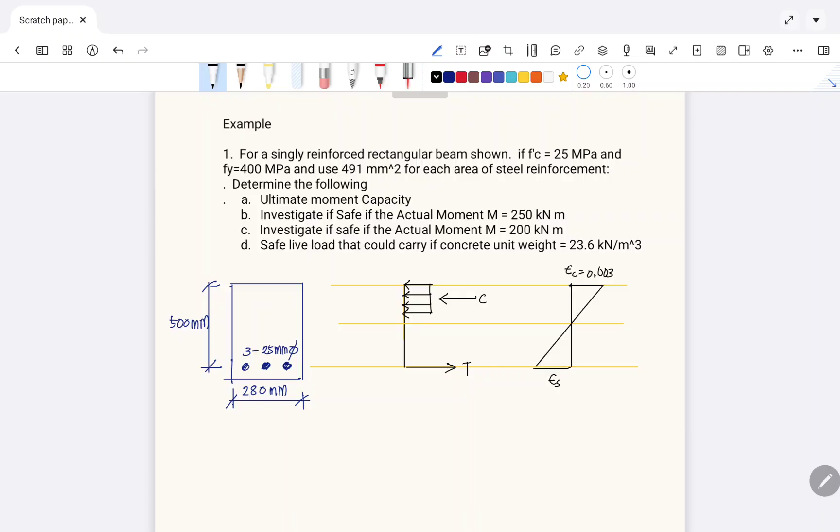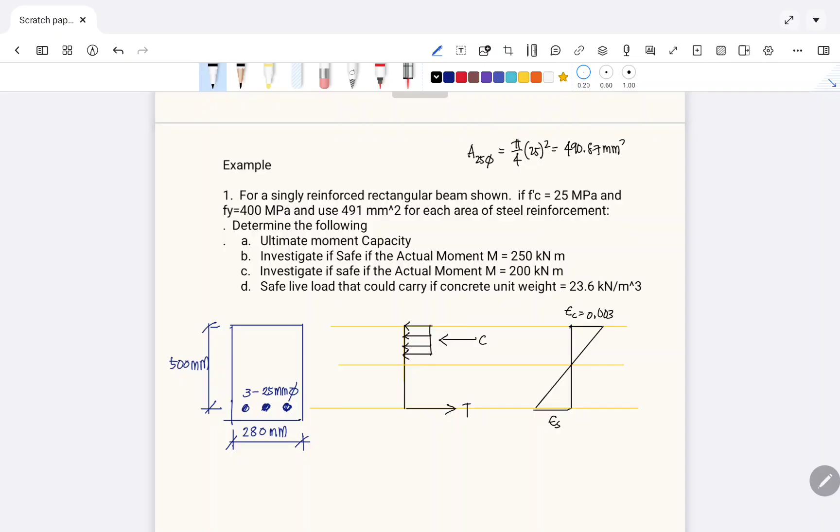Example: for a singly reinforced rectangular beam shown, FC prime is 25 megapascal and Fy is 400 megapascal, and use 491 millimeters squared for each area of steel reinforcement. The area of steel reinforcement was given in the problem. But if not given, you can use the conventional way: area of a 25mm diameter bar is pi over 4 d squared, so 25 squared, which gives 490.87 millimeters squared - almost the same. Since the problem already stated that the area used is for a 25 millimeter diameter bar, determine the following ultimate moment capacity.

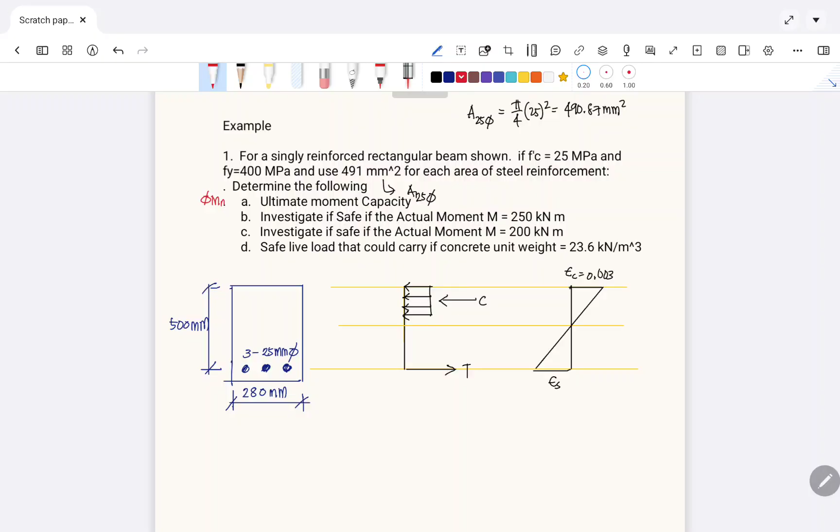So for number 1, what is asked is the phi MN. Okay, so this is an investigation - check if it's safe or unsafe. So what we'll do here is compare that phi MN should be greater than or equal to MU, our MU.

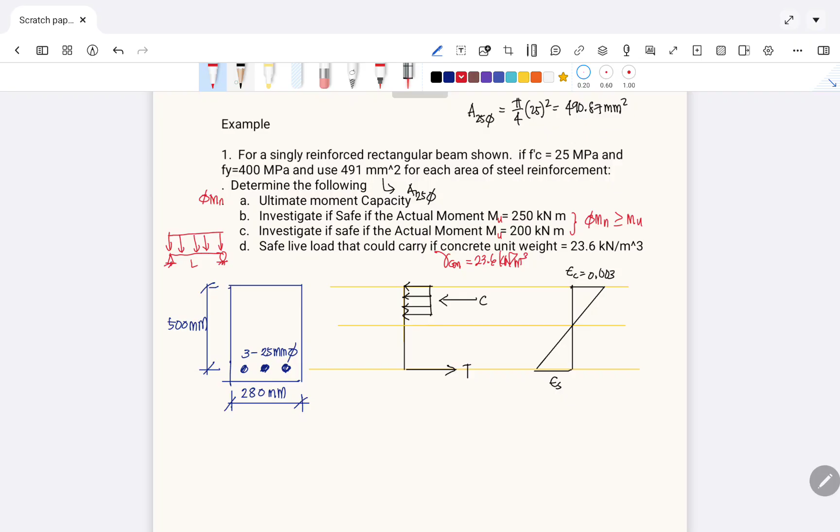Once we compute that, then determine the safe live load that it could carry if the concrete unit weight given is 23.6 kilonewton per cubic meter. Since it's not stated in the problem, it's automatically assumed to be a simply supported beam carrying only a uniform load, like this, with span L. The span L should be given, so let's add that it has a span of 6 meters.

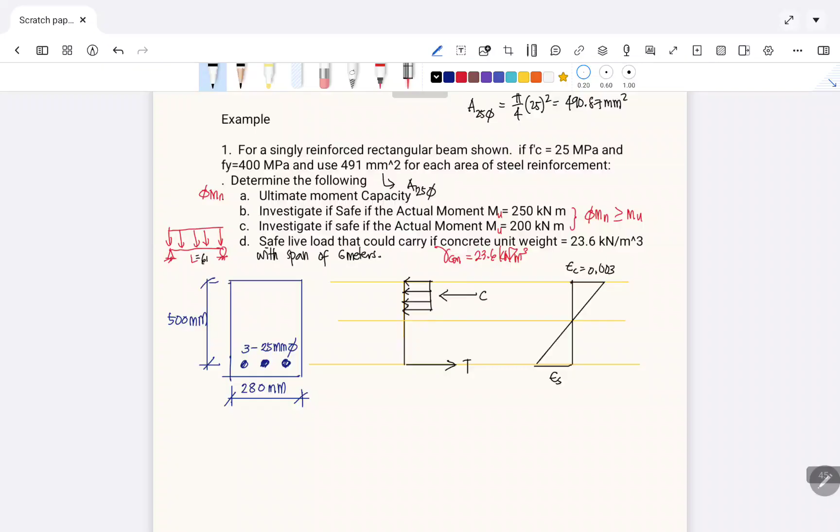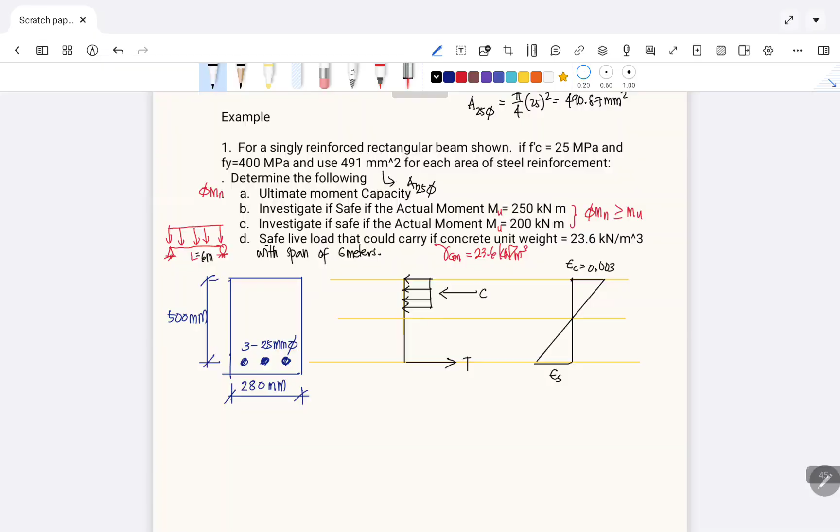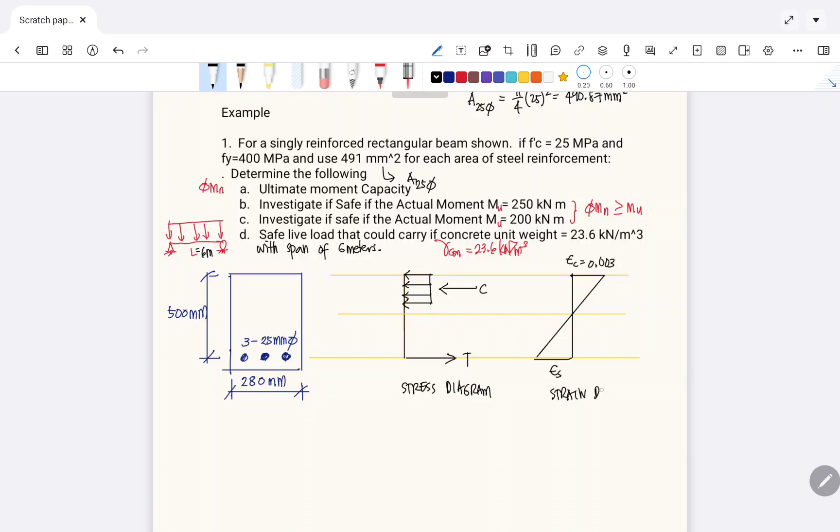Okay, so to solve this problem, let us now try to compute. So here I've drawn our stress diagram and our strain diagram. From that, we can now compute our capacity.

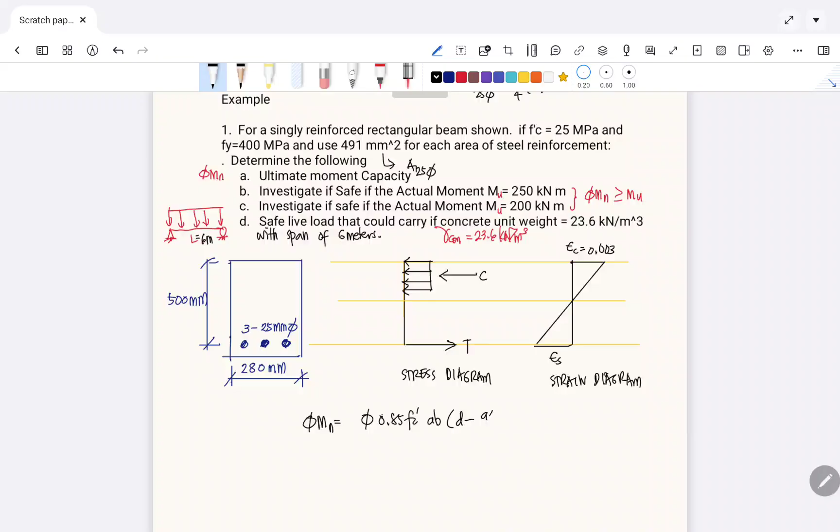Our capacity, phi MN, can be computed as 0.85 FC prime AB times (D minus A over 2). It can also be expressed as phi MN equals AS times Fy or Fs, times (D minus A over 2), depending on which one governs.

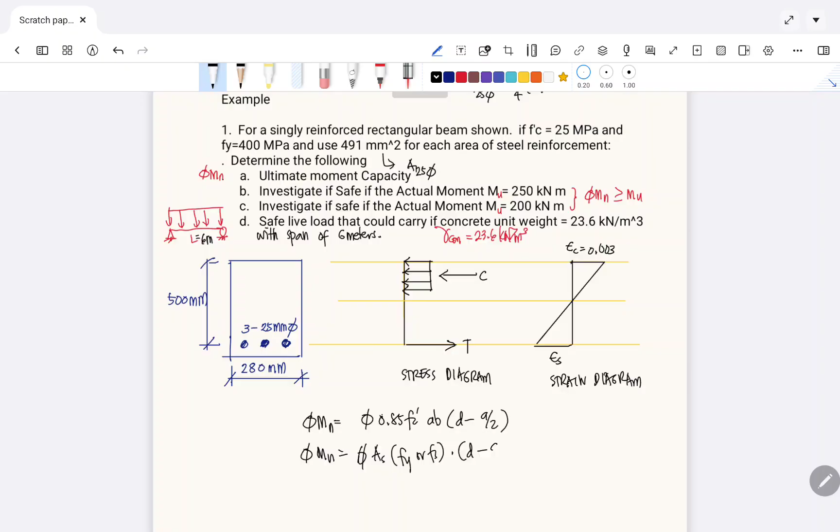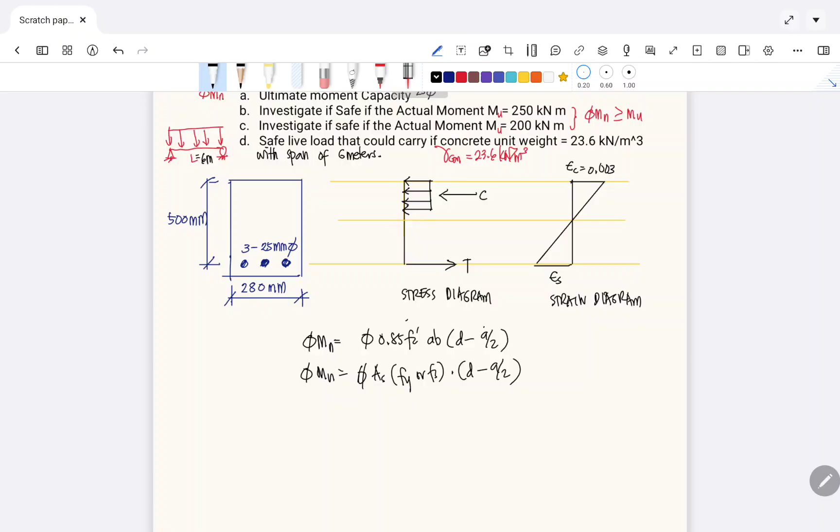Now, FC prime is given, so we can also compute phi. But first, let's compute the value of A, because our reduction factor depends on whether it's tension controlled or compression controlled.

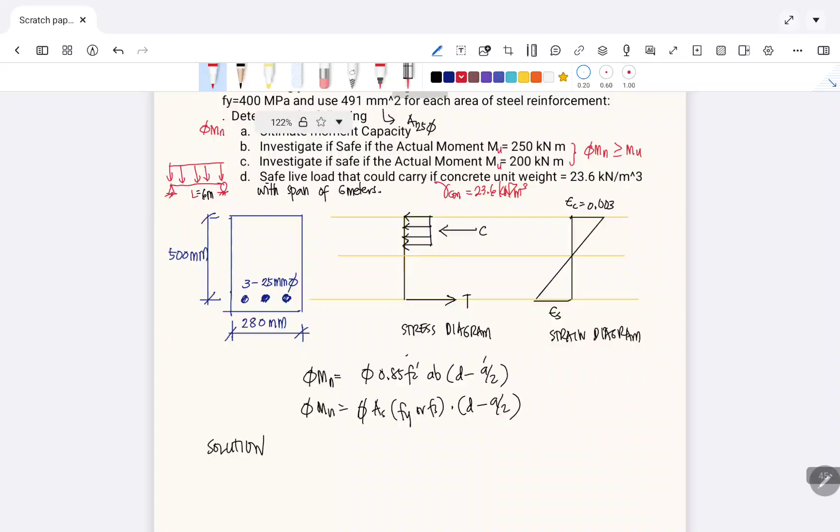So for the solution, let us now compute for the depth of the compression block. This is 0.85 FC prime AB, and this equals AS Fy or Fs, depending. Then this is Fy over Es or Fs over Es - that is the yield strain of steel. We don't yet know if we'll use Fs or Fy.

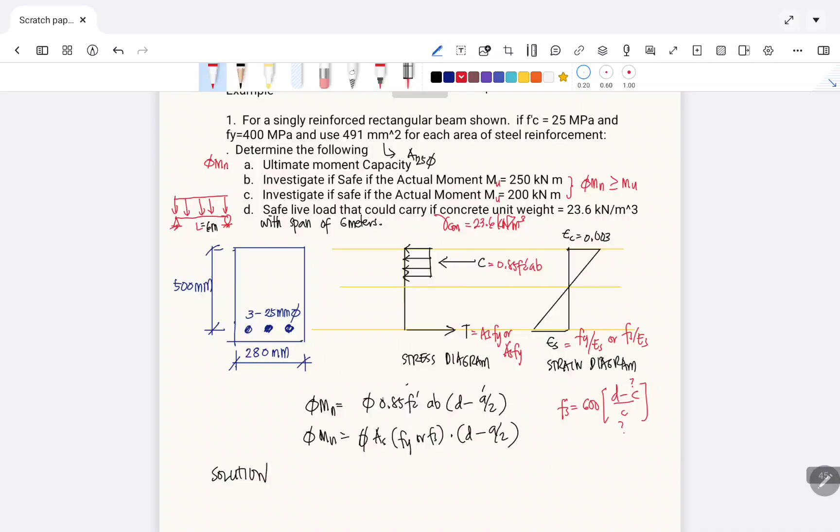So Fs is equal to 600 times (D minus C) over C. We also need to solve for the value of C, since our C is based on the depth of the compression block. So our solution requires us to first compute the depth of the compression block.

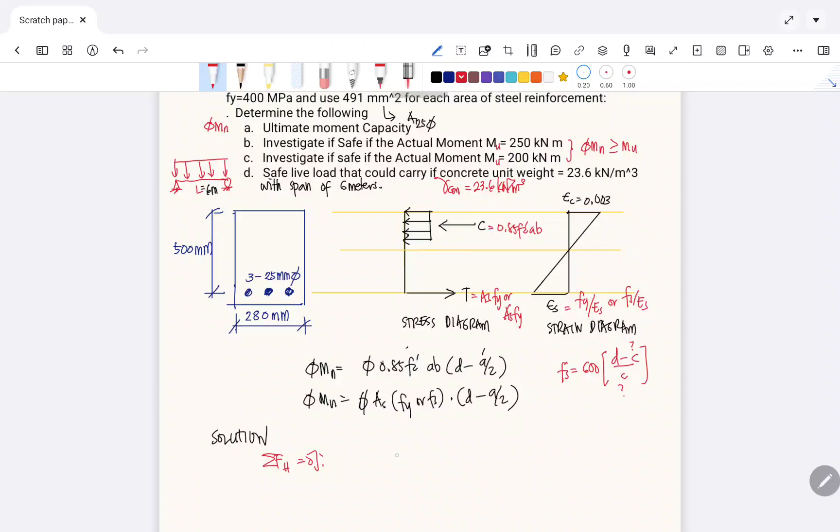By applying summation of forces horizontal equal to 0, C is equal to T: 0.85 FC prime AB equals AS times Fy or Fs - we don't know which yet. So let's assume tension steel yields; we'll make this assumption first to speed up our computation. So we assume that Fs is greater than or equal to Fy.

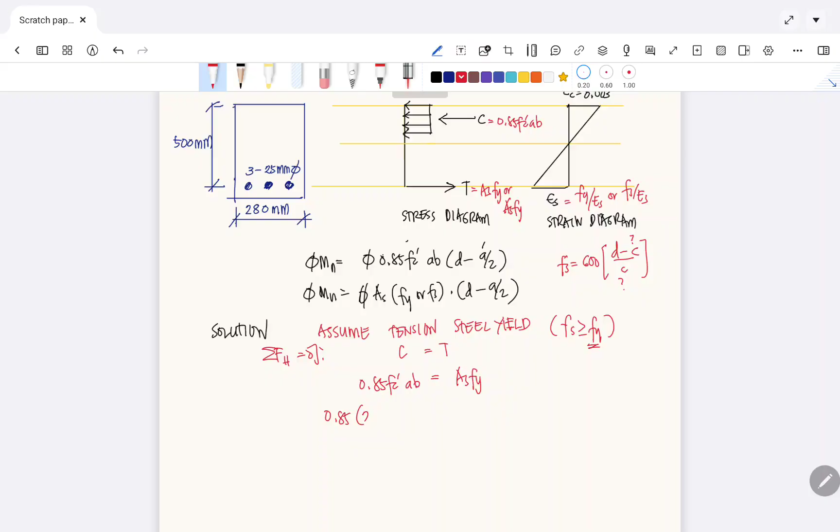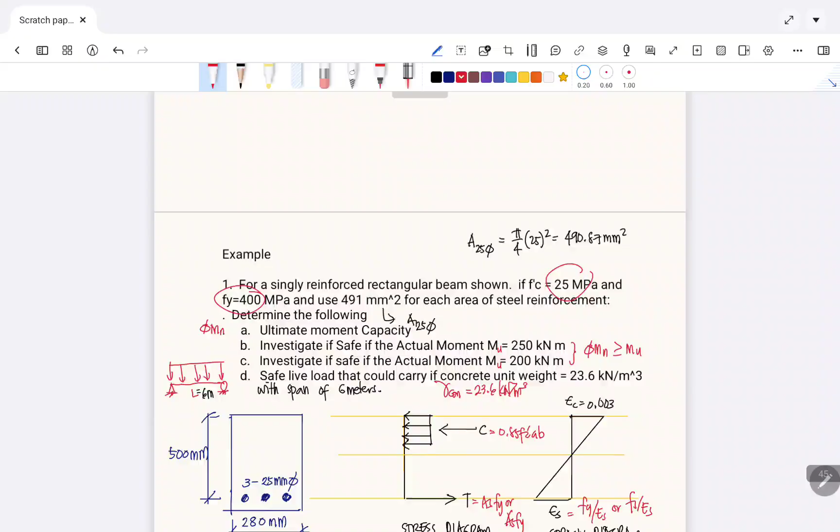AS is equal to - the problem states 491 is used, that's three 25mm bars - so 3 times 491 mm squared times 400. Solving for the value of A, we get A equals 99.025 mm.

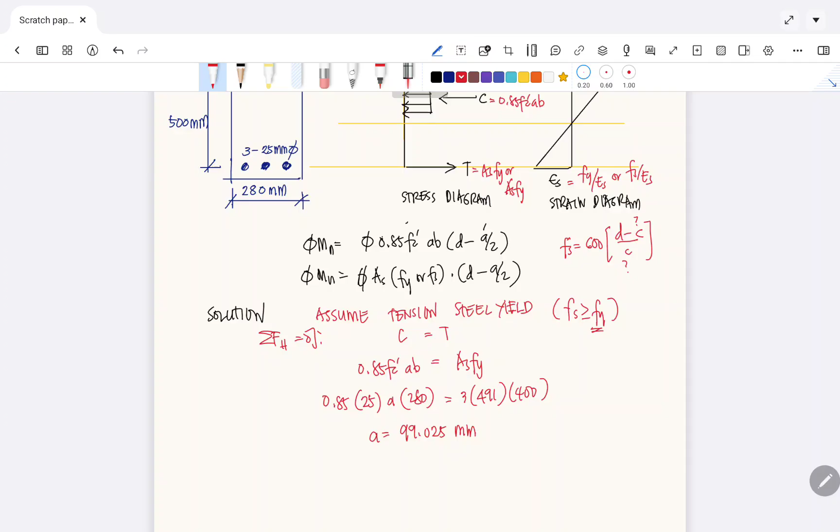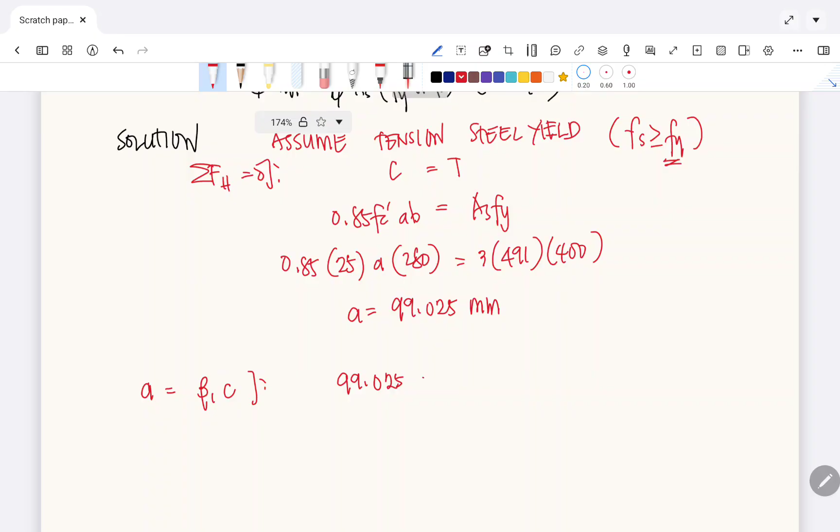Then how about the value of our A? Recall again the formula: A is equal to beta sub 1 times C. So 99.025 millimeters is equal to beta sub 1 times C - and we need to know beta sub 1 before we can compute this. So where does our beta sub 1 come from again?

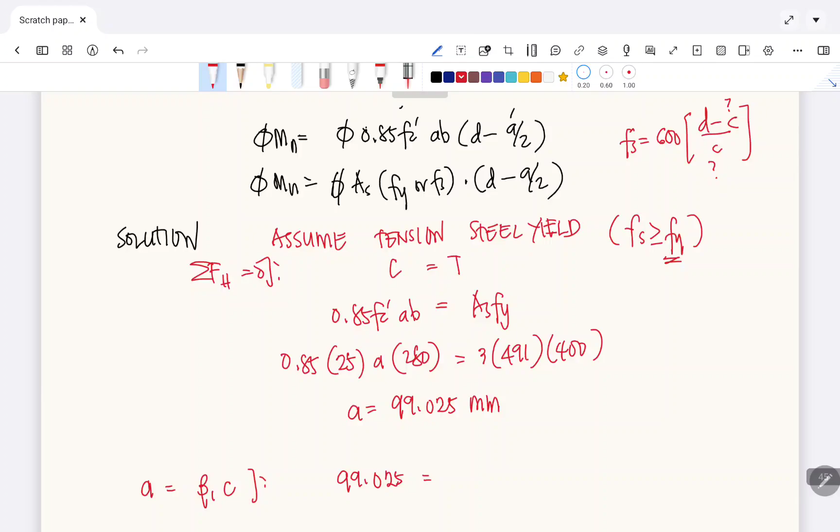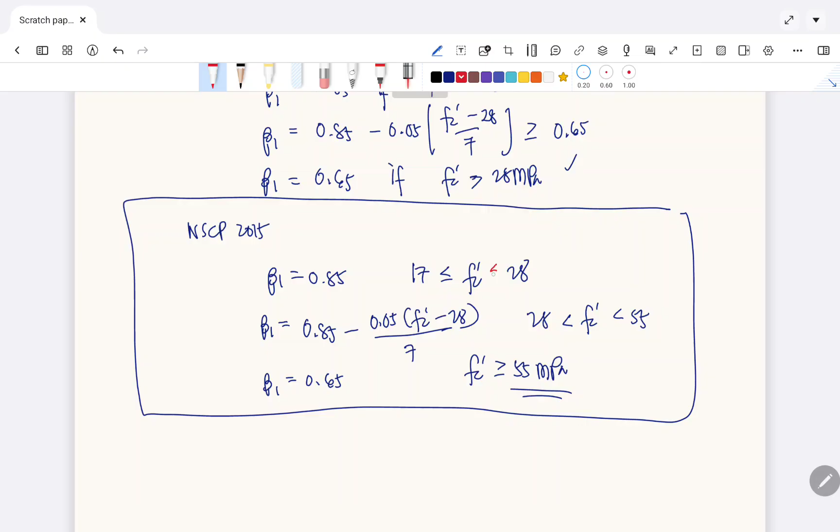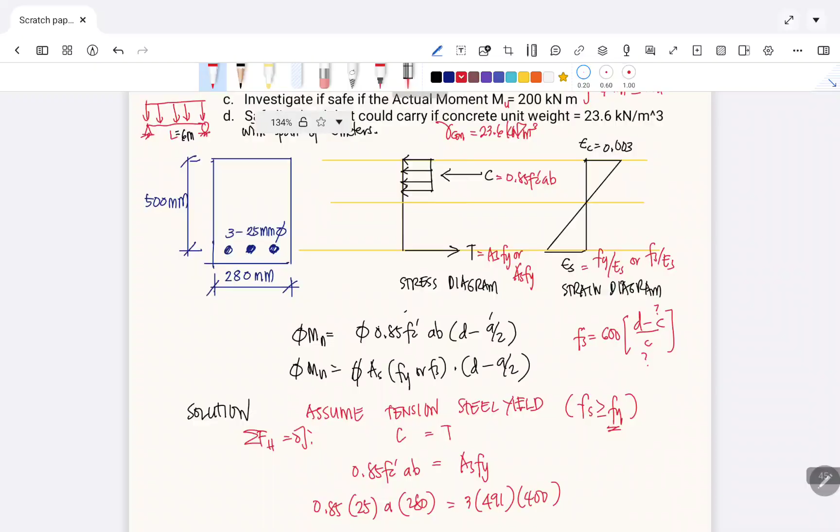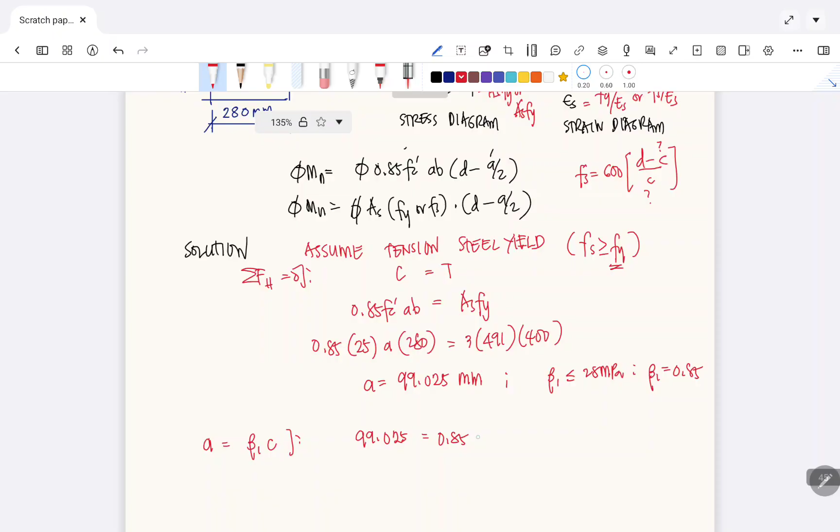So 0.85 multiply by C. Therefore, masolve natin dito yung value ng ating C, which is equal to 116.50 millimeters. So that is now the value of C.

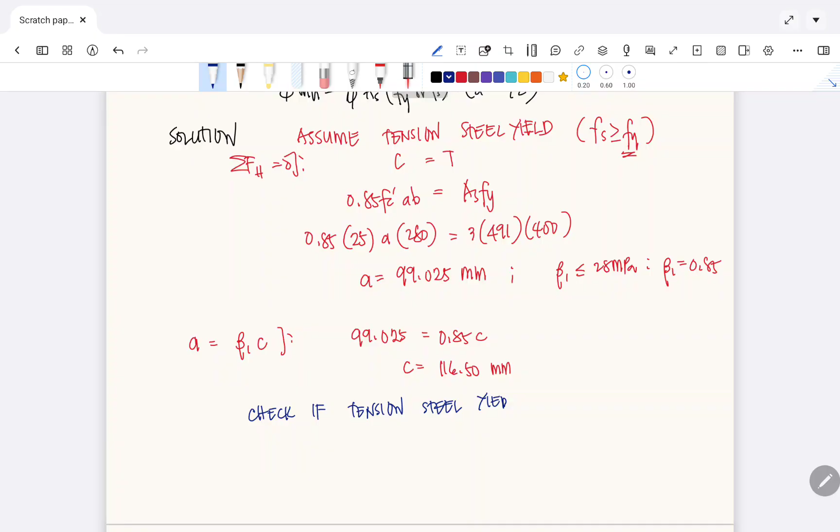Then, how to solve if nag-yield ba yung bakal o hindi? Paano natin malalaman? So check, dito na tayo sa second procedure. Step 1 yan, check. Step 2 is check if tension steel yield. Para malaman natin kung nag-yield ang bakal, comparison niya ng Fs and Fy.

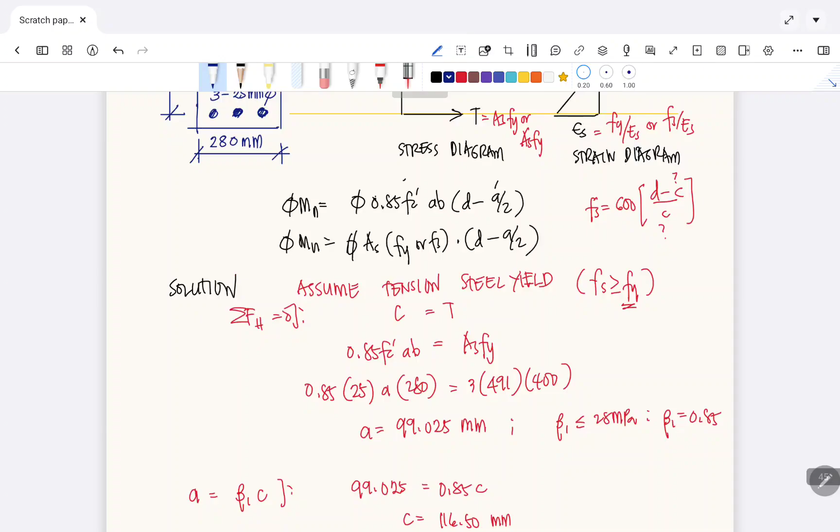Para masolve natin yan, given naman yung Fy natin, ang Fy natin 400. Ang hindi lang natin alam yung Fs. So applying the formula 600 multiplied by D minus C over C. Ito muna yung formula na i-apply natin. 600 multiplied by the effective depth, which is 500. Na-solve na natin yung C, 116.50 over 116.50.

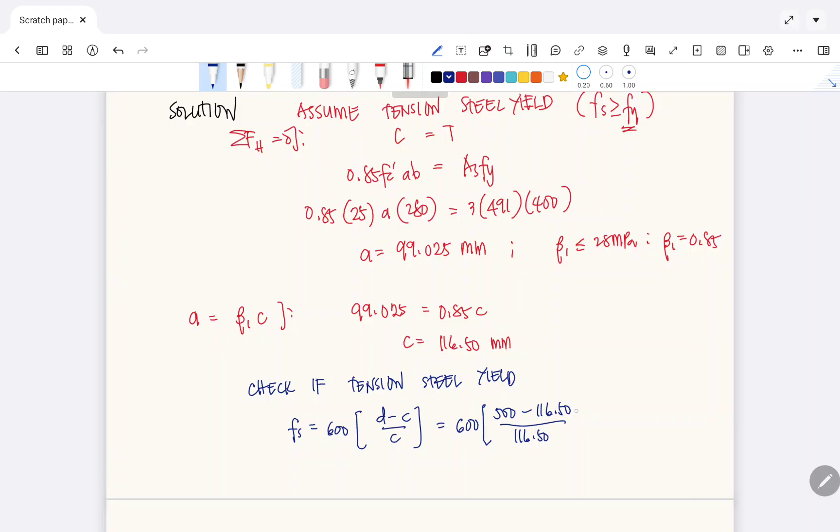So here, we can solve for the value of Fs, and the value of Fs here is 1975.11 megapascal. Itong Fs na to, i-compare natin siya sa Fy. Ang Fy natin is 400 megapascal. So therefore, this is greater than the value of Fy. Tama po ba yung assumption natin? Ang sabi natin, assume tension steel yield, Fs is greater than Fy. So therefore okay, TSY tayo, or tension steel yield.

Ibig sabihin, yung na-compute nating value ng A and C dyan are correct. Dahil alam na natin yan, pwede na tayong mag-solve ng ΦMn, or yung ultimate moment capacity. Pero bago yun, ito ay Fs value, dapat malaman natin kung tension controlled ba siya o compression controlled.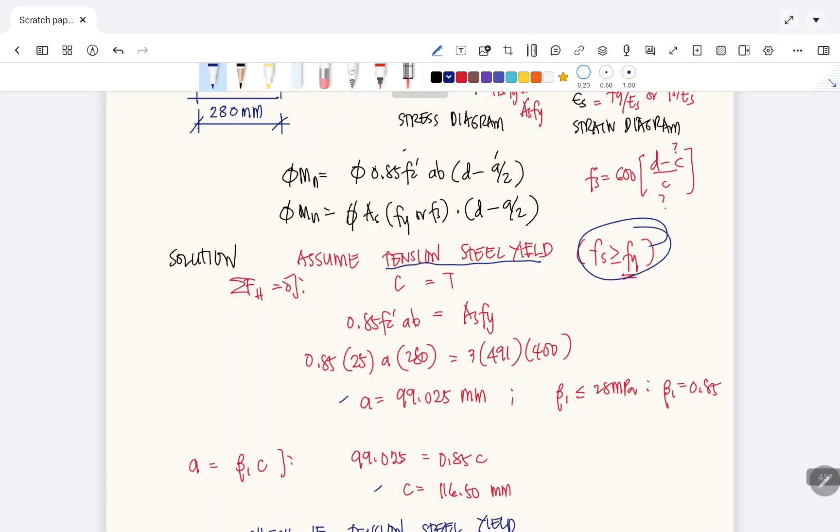Sabi natin ang ES ay 0.005 pagka tension controlled, ES is 0.002 kapag compression controlled. Kapag transition naman, in between ng dalawang yan. So let us try to compute for ES. Sana nga ulit equal yung ES. ES is equal to Fy over ES.

Pero sabi natin, nag-yield yung bakal. Dahil nag-yield ang bakal, Fy ang gagamitin natin. Ibig sabihin, ES is equal to Fy over ES. So kung gagamitin natin yan doon, that is Fs din kasi yan. Kumbaga, ang magiging formula niyan ay Fy over 200,000.

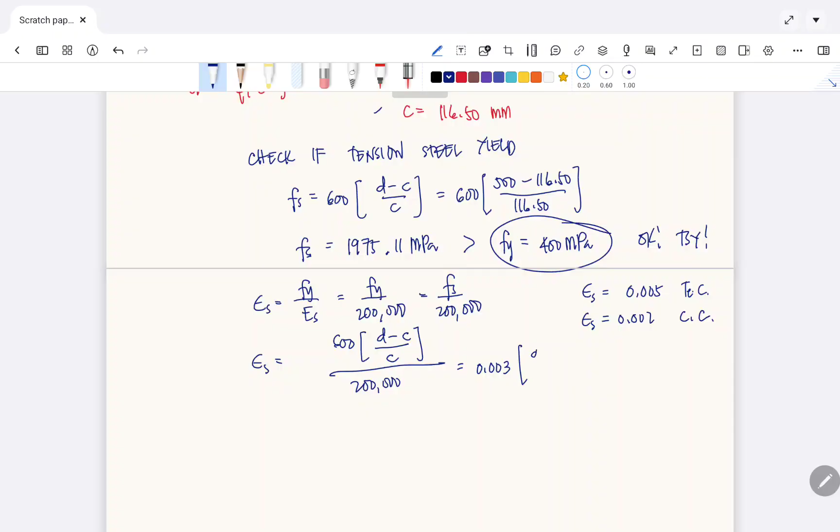Okay, so to solve for Fs, magiging Fs over 200,000 din yan. Ang ES natin ay equal sa Fs na 600. 600 D minus C over C, all over 200,000. So babalik lang to sa 0.003 times D minus C over C. Pang check lang natin ang ating strain.

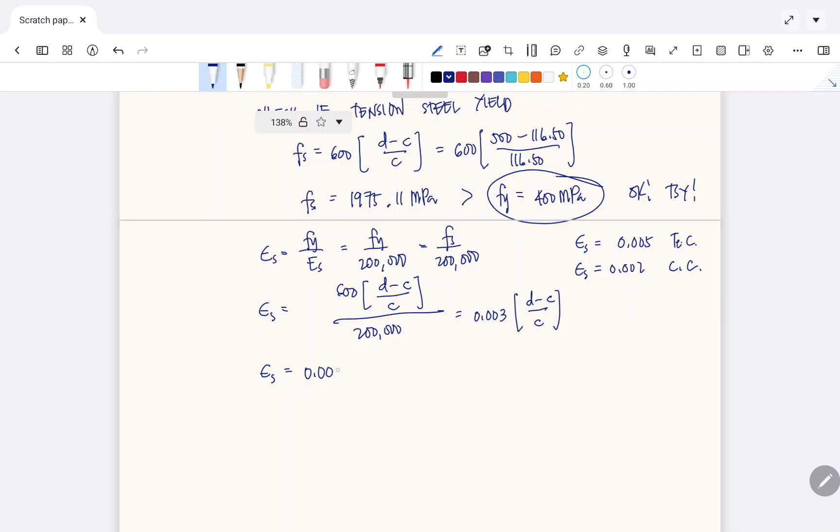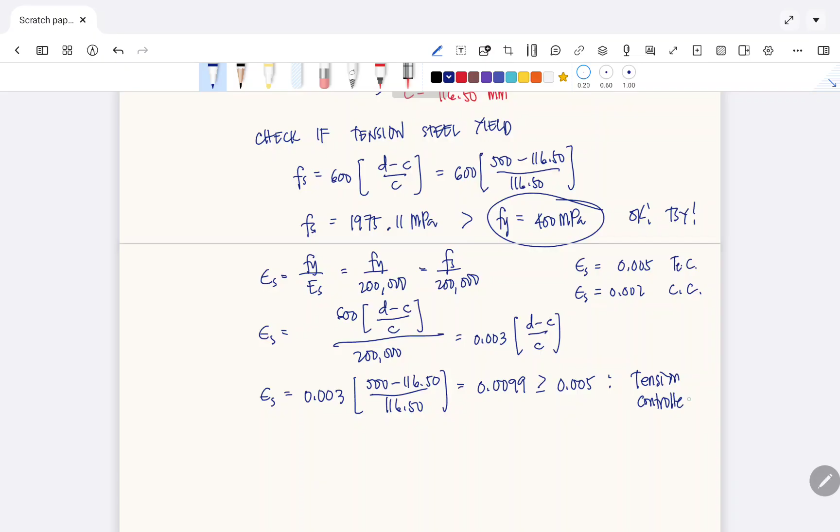Pero kahit hindi na natin ma-check yung ES, since nalaman naman nating tension controlled siya, maganda pa rin i-check pa rin natin. So try lang natin compute. 0.003 times D is 500 minus 116.5, yung ating C, over 116.50. Here, the value is 0.0099, which is greater than or equal siya sa 0.005. So therefore, tension controlled siya. Sabi natin kanina, pagka mas malaki siya sa 0.005, nandun siya sa tension controlled.

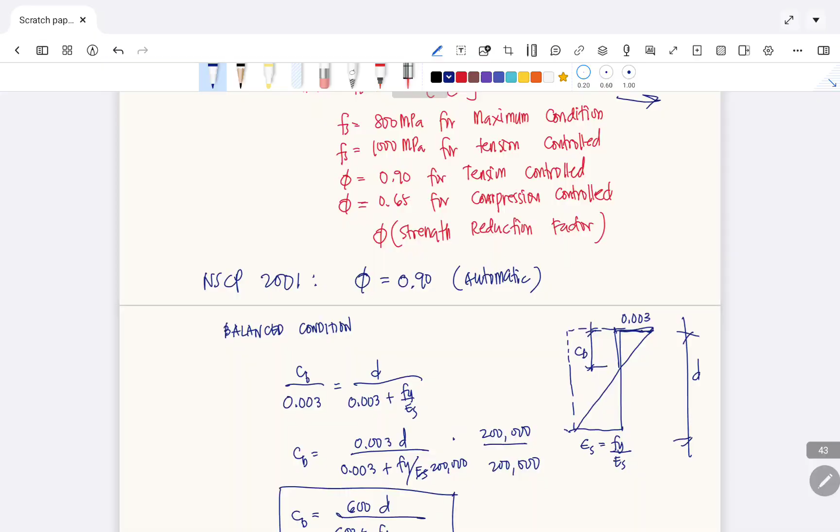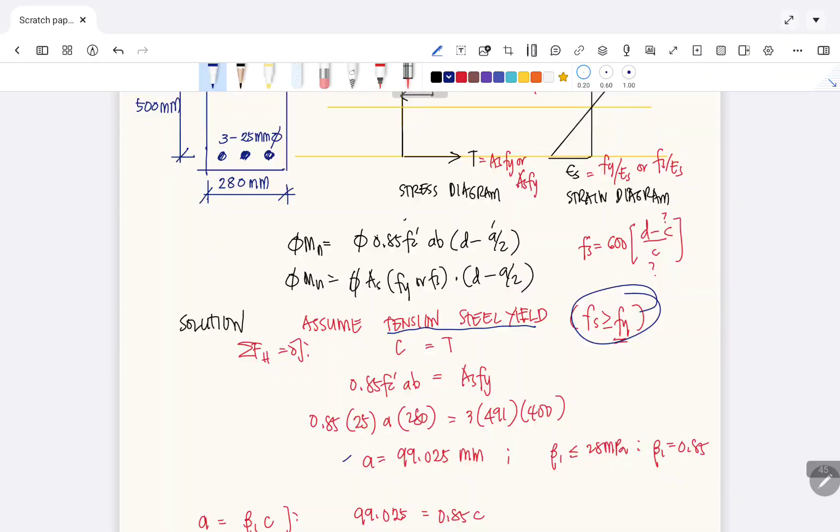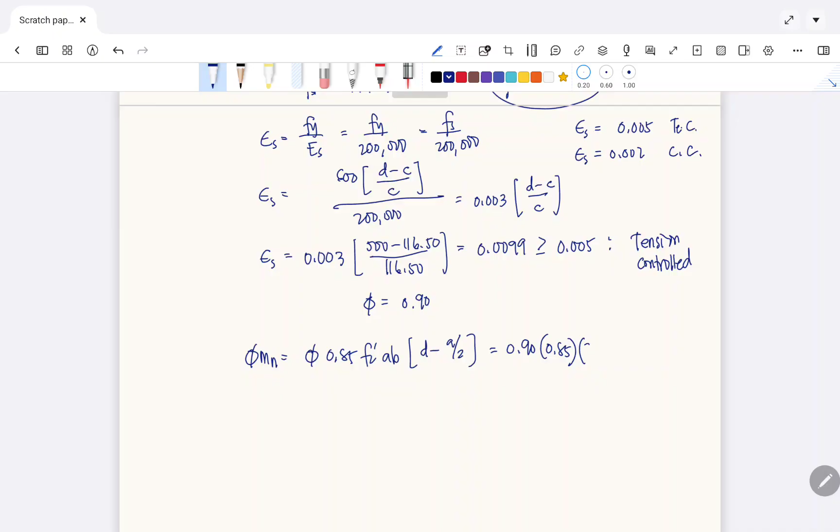Alam na rin natin yung A. Therefore, pwede na nating masolve yung ultimate moment capacity. So phi Mn is equal to phi, 0.85 FC prime AB times D minus A over 2. That is 0.90. What is 0.85? FC prime is 25. Tapos, A is 99.025 times... okay, hindi magkakasya, dito na lang sa baba.

So 0.90, 0.85, 25. 99.025, yan yung value ng A kanina na na-compute. Tapos yung B is 280 times 500 minus A over 2, which is 99.025 over 2. So, ang value ng phi Mn dito ay 238.88 times 10 raised to 6 Newton millimeter, kasi naka-Newton at millimeter yan. So kung i-convert natin into kilonewton meter, mawawala yung times 10 raised to 6, magiging 238.88 kilonewton meter. So this is now the value of phi Mn.

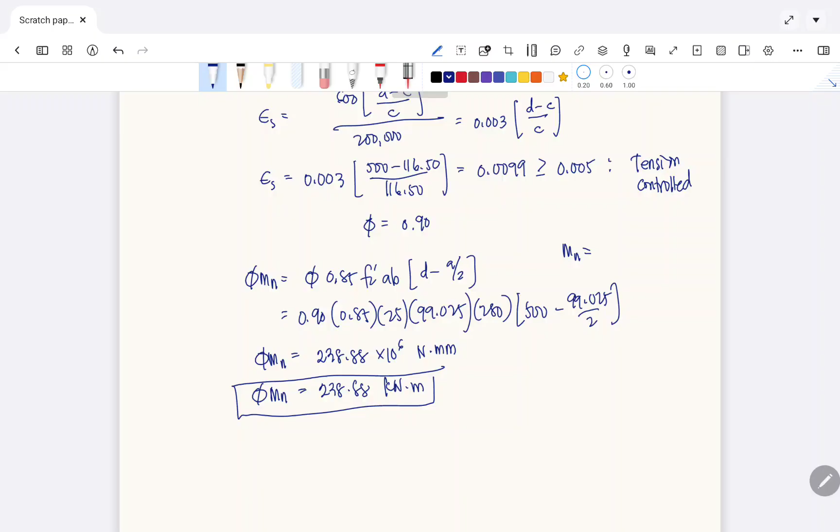Yan ay kung magsasummation tayo, Mn is equal to C times Z. So, other way ng pag-solve ng phi Mn natin is equal to phi As, Fy or Fs. Fy na ang gagamitin natin, D minus A over 2. So this is 0.90. Ilang bakal? Tatlo. Tapos, anong gagamitin? 491 times 400, times gagamitin na area ng bakal yung ibig ko sabihin doon. So tapos minus 99.025 over 2. So, the value of phi Mn here is 238.88 kilonewton meter. Mapapansin nyo, same siya, dapat ang magiging value dahil yan ay equilibrium.

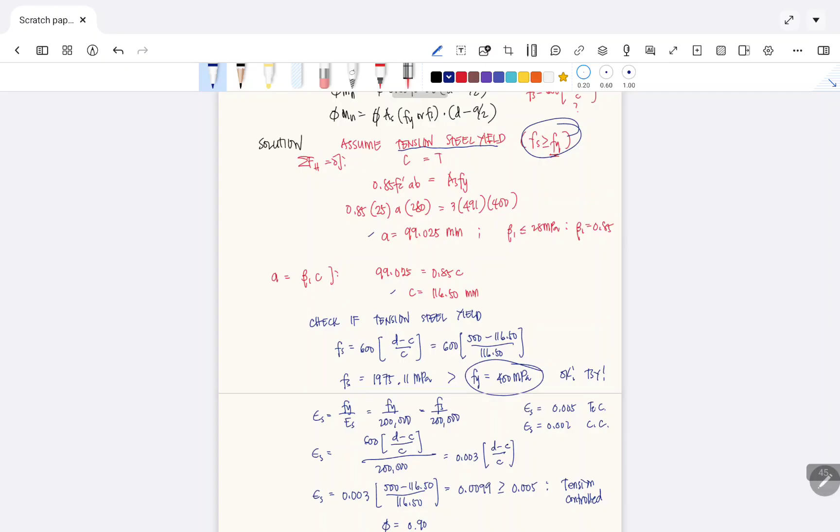So, here is the answer for letter A. Okay, to solve for letter B, sabi niya, kapag actual moment capacity, yung maximum moment na nakuha mo ay 250. So letter B, if MU is 250 kilonewton meter, safe or unsafe?

Sabi natin, phi Mn must be greater than or equal to MU. Greater than ba siya? So ang ating phi Mn is 238.88 while yung ating MU is 250. So therefore, ito ay less than, so therefore unsafe. So pagka unsafe, hindi po magandang implementation yan. Ibig sabihin, mas malaki yung ultimate moment capacity mo. So kailangan either magpalaki ka ng size ng beam or magdagdag ka ng tension reinforcement po sa bakal natin.

So letter C naman, if MU is equal to 200 kilonewton meter, safe raw ba? So phi Mn is 238.88, then MU is 200 kilonewton meter po yan. So therefore greater than, so ito po ay safe.

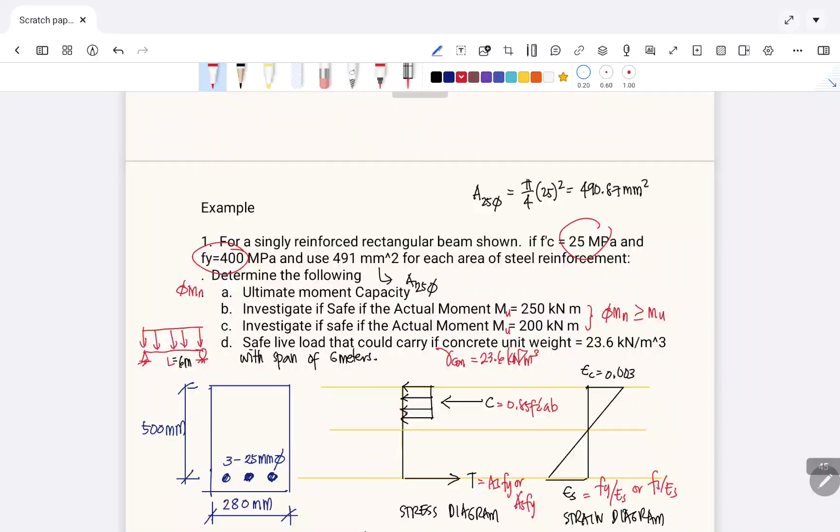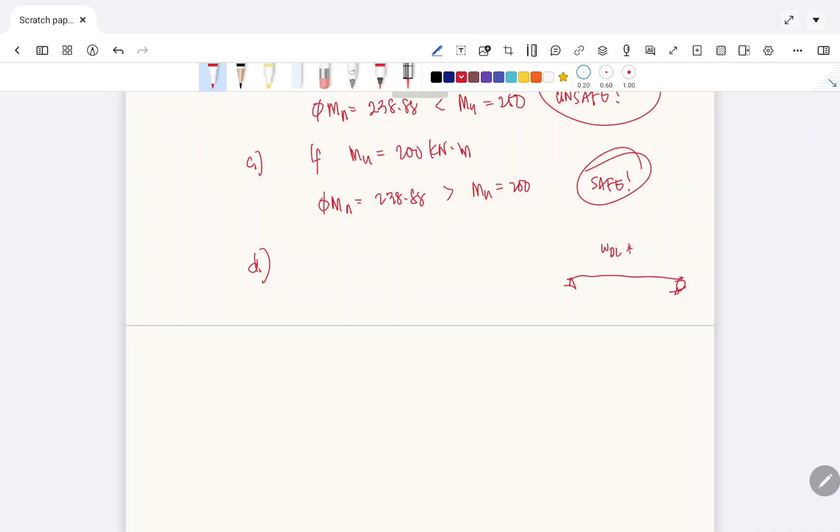Okay, so for letter D, ang pag-solve po natin doon ay, sabi niya, safe live load. So kung meron tayong uniform load dito, meron tayong dead load plus live load. So pag hindi sinabi sa problem, automatic yan, yung dead load na dinadala niya is yung bigat ng beam. Tapos L is 6 meters. So to solve for the maximum moment, ang maximum moment dito ay WL squared over 8. Kung hindi niyo alam kung WL squared over 8 ba, gamit kayo ng shear and moment diagram.

So Mmax is 238. Ang gagamitin mong Mmax dito, yun na yung value ng phi Mn, kasi ililimit mo na sa value na yan yung kanyang capacity. So 238.88 is equal to W ultimate times L is 6 meters over 8. So therefore, ang mako-compute nating value ng ultimate uniform load is 53.08 kilonewton per meter.

So ngayon, hindi natin alam yung dead load. So ang tinatanong dito is safe live load. Para malaman, dead load is equal to gamma times area. So gamma is 23.6 kilonewton per cubic meter daw ang gamitin natin na unit weight, times yung area ng beam ay 0.28. Okay, yun yung base niya.

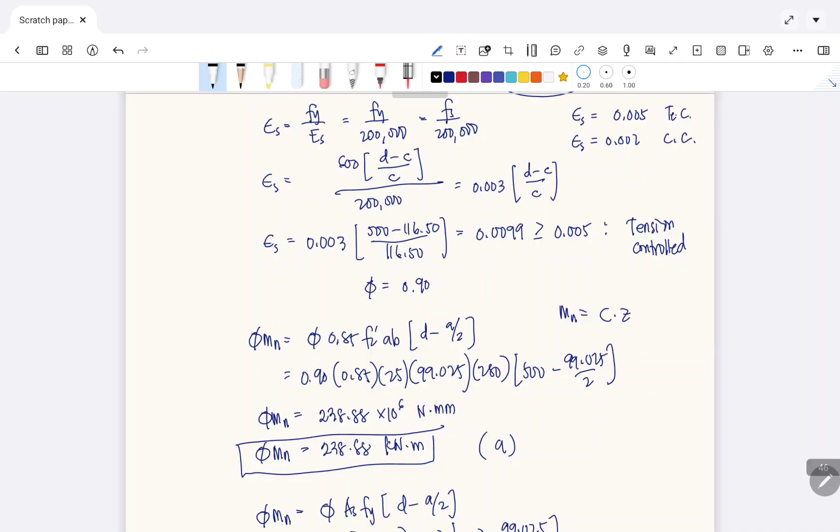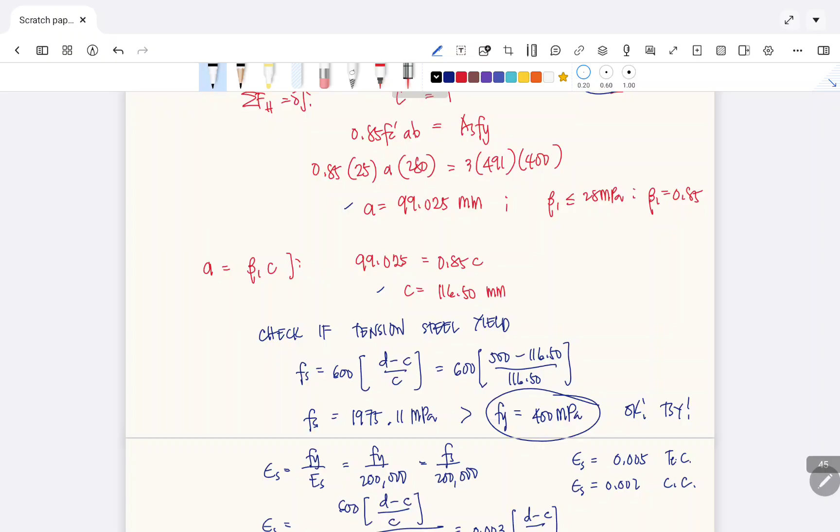Pero dapat ay total height to. So in case man na hindi binigay, dapat meron tong given. So let's say 60 millimeters to. So kung 60 millimeters yan, magiging 560, or multiply by 0.56. So ang dead load natin ay 3.70 kilonewton per meter.

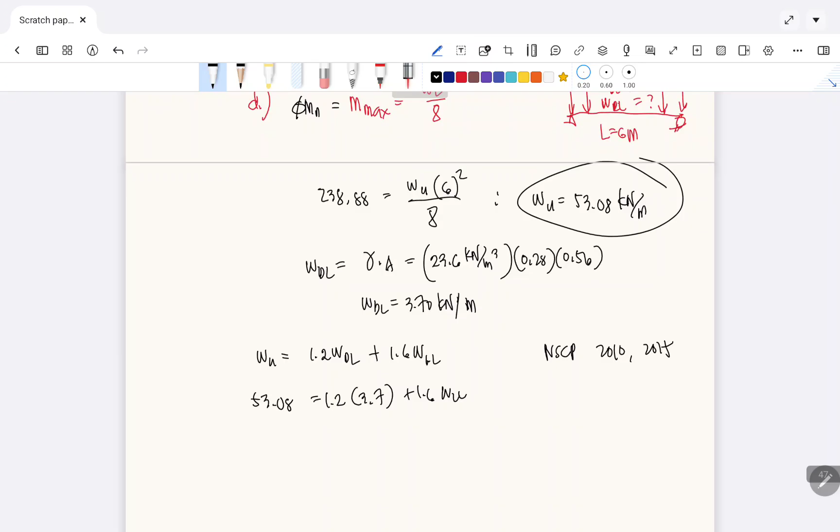Okay, so ultimate is 1.2 dead load kapag NSCP na bago, plus 1.6 ng live load. NSCP 2010 and 2015 na. So ultimate load, ilan yung na-compute natin? Ito 53.08 is equal to 1.2 ng 3.7 plus 1.6 ng live load. So mapapalabas nating weight ng live load dito ay 30.40 kilonewton per meter.

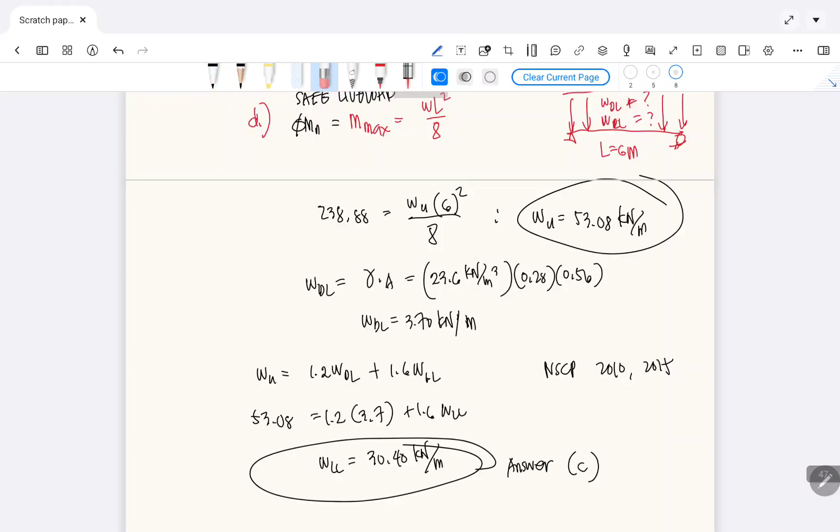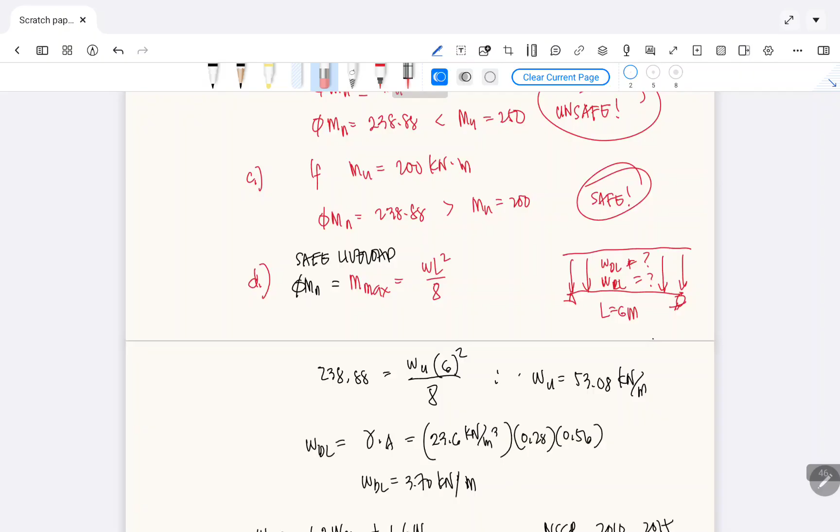So here is now the answer for this problem. So this is the answer for letter C. So this is not the answer, binilugan ko lang itong sa ultimate. Tapos this is the answer for letter B and C. Tapos this is the answer for A.